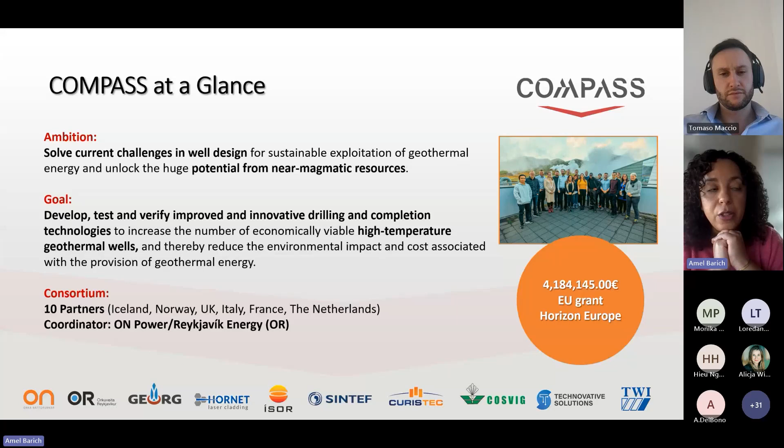and also supporting the environmental aspects around geothermal drilling in terms of reducing the footprint of wells and drilling, and the overall environmental and social impact of such developments. Compass is a consortium of 10 partners from Iceland as the coordinator, Norway, UK, Italy, France, and the Netherlands. The coordinator in Iceland is On Power, supported by Reykjavik Energy. The budget is a bit more than 4.1 million euros, and this is a grant from Horizon Europe.

So moving on to our speakers, we have 4 speakers from the Compass Consortium from 4 different partners. Our first speaker is Hieu Nguyen Hoang, a senior scientist at SINTEF in Norway, and an expert in geothermal energy and thermal energy storage. His expertise also includes geothermal well design, high temperature applications, and materials integrity, on which his talk will be today. And then Tomaso Maccio, who is a project engineer at TWI and a specialist in laser additive manufacturing. His expertise includes powder bed fusion, directed energy deposition, and extreme high-speed laser application, also known as EHLA technologies. And his talk will be focused on that.

Tom has been leading the first project in the UK developing such technologies, which led to the largest cell being developed in Yorkshire in the UK. And then we have Arna Paulsdottir, who is head of resource innovation at Reykjavik Energy. She has a strong background in chemical engineering, and her expertise includes valorization of geothermal waters, lithium extraction, and geothermal resource development. She's also involved in leading the latest IDDP, or Iceland Deep Drilling Project, the third one, which Reykjavik Energy is working on to make happen, hopefully in the coming years.

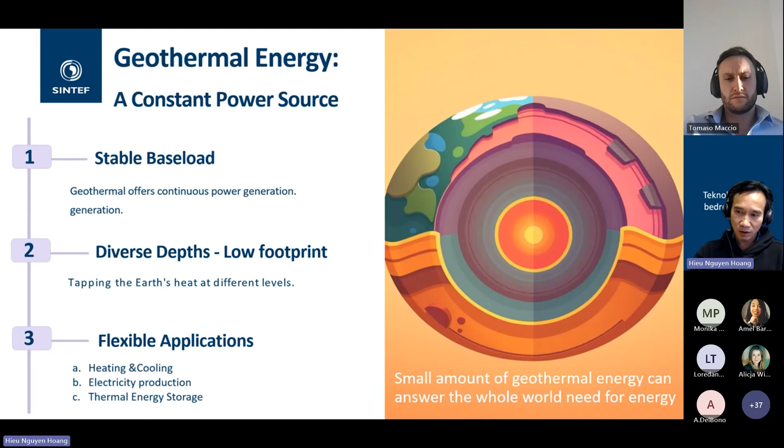As most of you may know, geothermal energy is a very reliable and sustainable power source that we can harness from inside the earth. It offers very continuous energy production, regardless of external factors like weather. The versatility of geothermal energy allows us to use it not only for heating and cooling, but also for electricity production and even for energy storage. What is interesting with this technology is that even a small amount of energy from the earth could meet the whole world's need for energy, and it makes that type of energy a very interesting and essential player in our future sustainable energy mix.

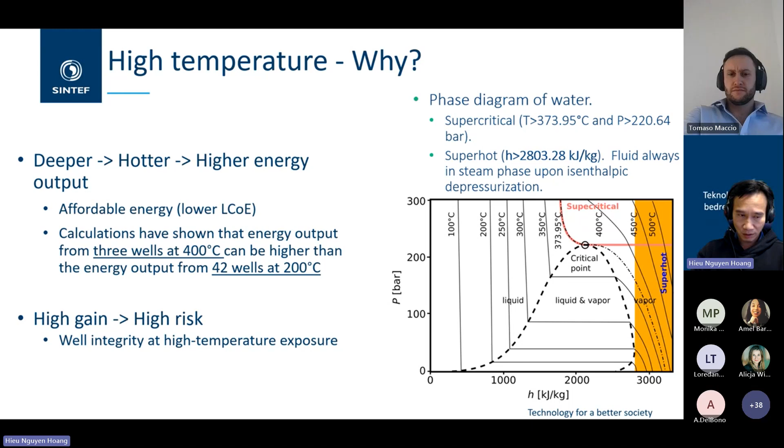Why are we focusing on high temperature applications in this project? Simply put, we know that the deeper we go, the hotter it gets, and the higher energy output we can have. Many studies have shown that just 3 wells at high temperature, like 400 Celsius, can produce more or less the same energy as 42 wells at 200 Celsius. It makes high temperature applications not only low footprint, but also economically attractive. But as you know, with high gains come high risks, as usual, right? Particularly for well integrity in this application, when the whole wells are exposed to high temperature.

Operating at high temperature conditions introduces a unique challenge for well integrity, because we have temperature cycling, high temperature introducing a lot of thermal expansion, leading to high thermal stress in the casing and cement. And we have nasty chemistry in the produced fluid, including hydrogen chloride, and this is very detrimental for casings, leading to serious problems related to corrosion and scaling that we have seen in many wells in the past.

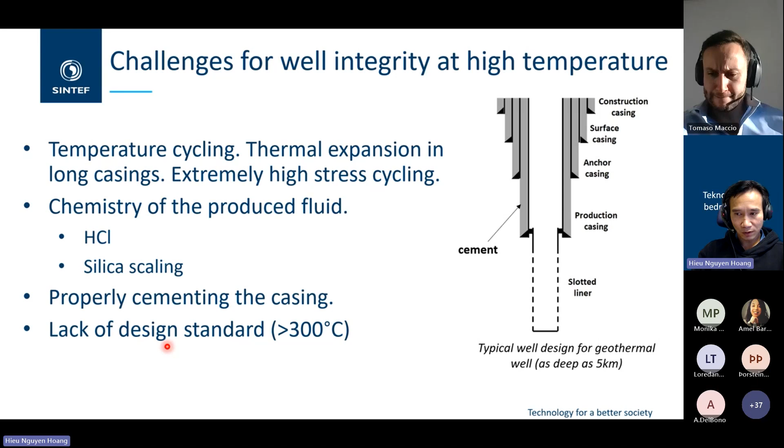In addition, we need to do a proper cementing job of the casing, especially when we need to cement from the casing shoe to the surface. It is extremely challenging because these wells are as deep as 5 kilometers, and cementing that long distance is not that easy. This is a one-time job. If we fail in the cementing job, we may fail the whole well construction and we lose the well. And the lack of design standards for operating beyond 300 Celsius adds complexity to the next level. So addressing all of these issues is crucial for developing reliable geothermal operation in the future.

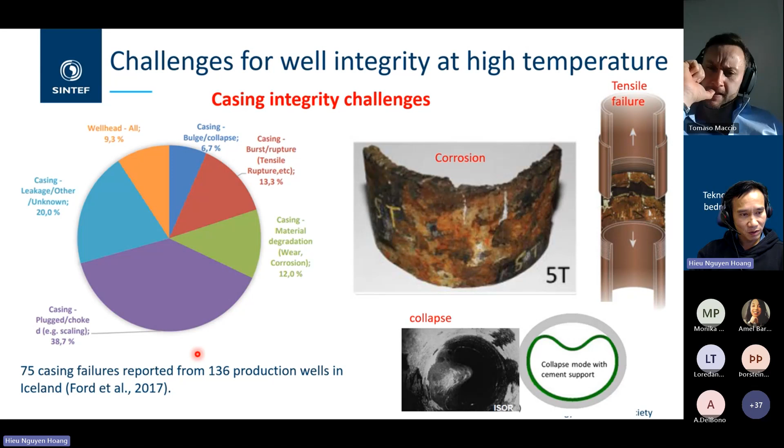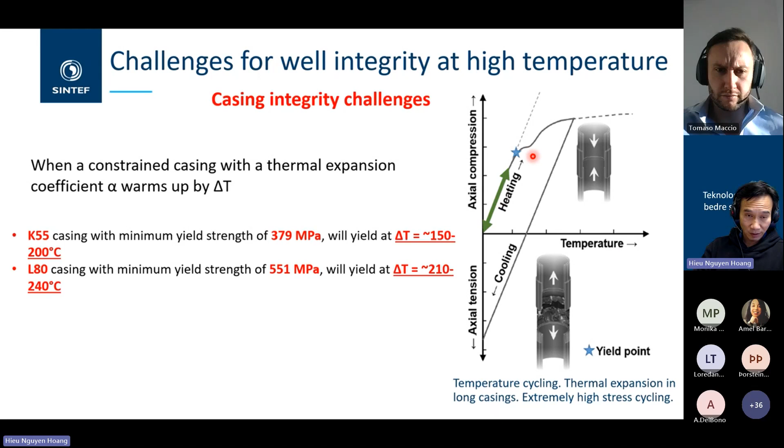Innovative solutions are needed to reduce thermal stress and bring the thermal stress in the casing system to an accepted level, like the elastic limit here, when we are operating at high temperature. The reduced stress will ensure long-term well integrity.

To address all of these challenges in an effective way, we need to have a deep understanding of downhole physics in this application. And at SINTEF, we develop advanced simulation tools for high temperature well analysis, which allow us to explore the use of different materials, like advanced materials for casing and cements, explore the use of advanced solutions like flexible couplings, and develop alternative well design constructions to enhance performance and reliability.

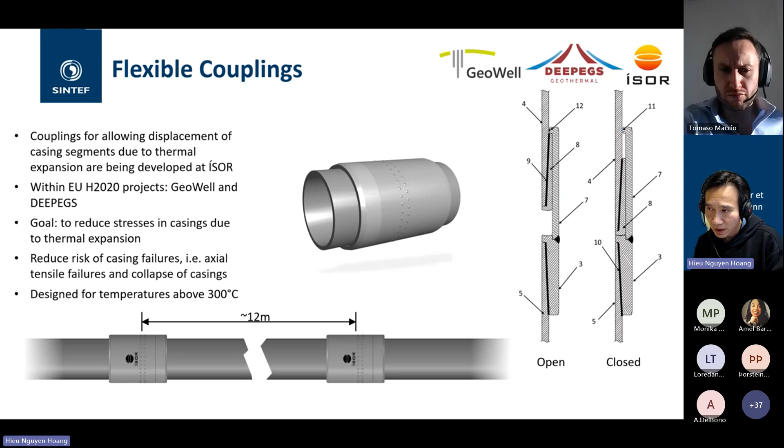It represents a breakthrough technology addressing the thermal expansions. It was developed mainly in this Horizon 2020 project, GeoWell, and these couplings allow the casing segment to move in axial directions in order to reduce thermal stress and minimize the risk for failure, like casing tension and collapse. And this coupling can be designed to operate at high temperature, above 300 Celsius or even higher. And we believe that this technology is a game changer for future geothermal well integrity as a whole.

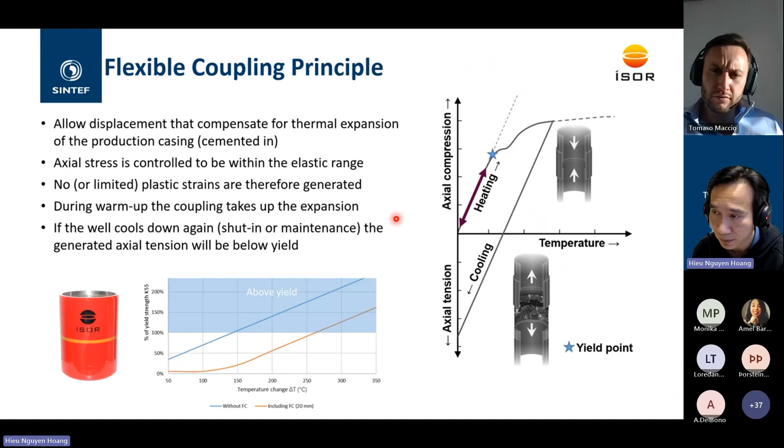And let's have a look at how this flexible coupling works. As you see here, when we are heating up the casing, the flexible coupling absorbs the thermal expansions, allows the casing to move in the axial direction, and absorbs the thermal expansion in these directions, meaning keeping the axial stress at an acceptable level, and prevents plastic deformation in the casing system as a whole. And this ensures the casing system remains intact during the temperature fluctuations, making it a very attractive solution for future application.

Okay, and move forward. Okay.

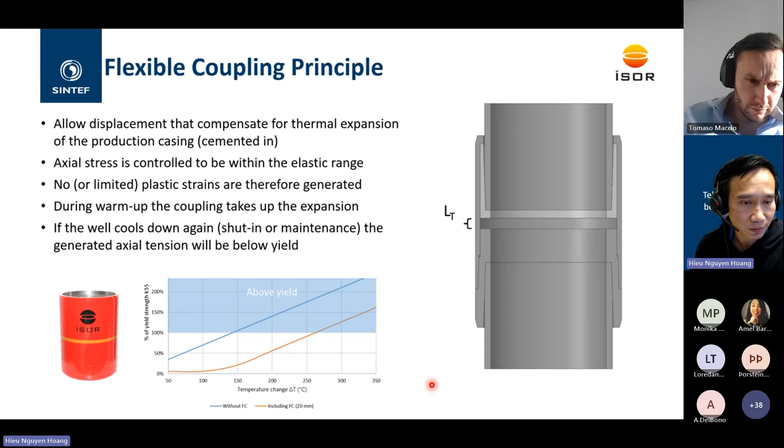And another key innovation that we're investigating in this project is a flexible foam cement. The core idea is that we would like to increase the flexibility of the casing system as a whole, not only in axial directions by flexible couplings, but also in radial directions. So the foam cement, as you notice, is more compressible, and we believe that it can work hand in hand with flexible couplings to enhance the flexibility of the casing system as a whole, and then we can reduce thermal stress. This is the principle behind this core concept.

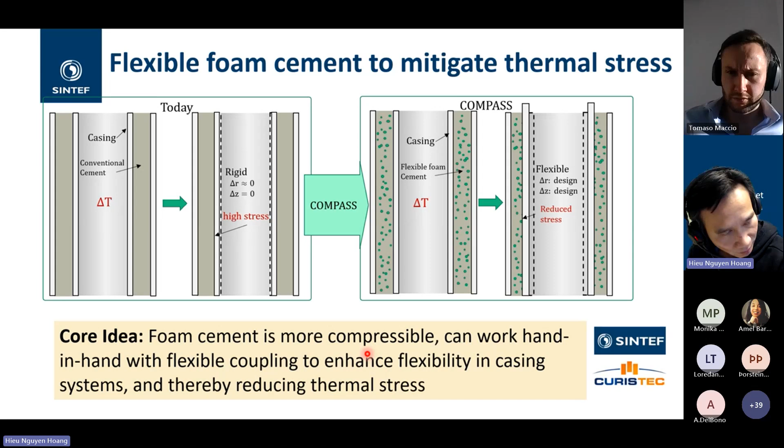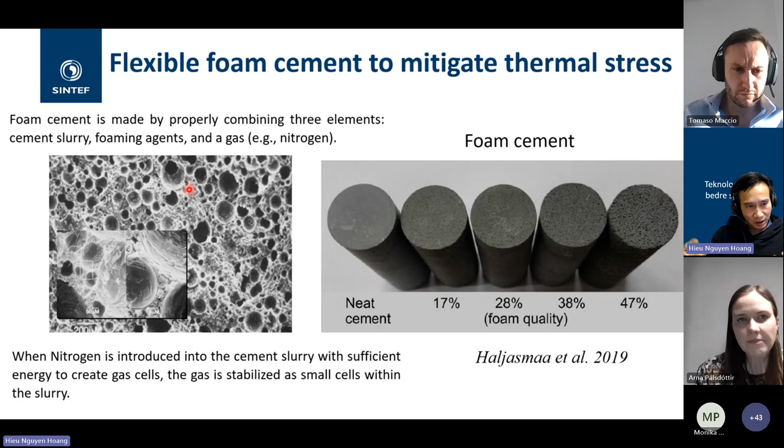And the foam cement, as you see, is made up by properly combining three elements: cement slurry, foaming agents, and gas such as nitrogen. When we inject the nitrogen gas into the cement slurry with sufficient energy, like inner pressure, we create gas cells, and the gas is stabilized in small cells within the slurry, creating a lot of bubbles and porosity, increasing the flexibility of the whole foam cement system.

In comparison to conventional cements, the foam cement offers low density. It means lightweight, minimizing the risk of loss of circulation. We have a low Young's modulus to increase the flexibility, but at the same time we have high ductility and high compressibility. It means that we have a lower risk of cement fracture and lower risk of microannulus creation. The only drawback is that this is quite a new solution, so the testing facilities are still not optimal yet. So we still do a lot of work to qualify and develop these solutions.

And here you see the proper design of foam quality is very crucial to ensure stability and optimal cement density, lightweight cement for a successful cement job, and also to ensure the mechanical properties of foam cement for sufficient load-bearing capacity when the cement is hardened and set.

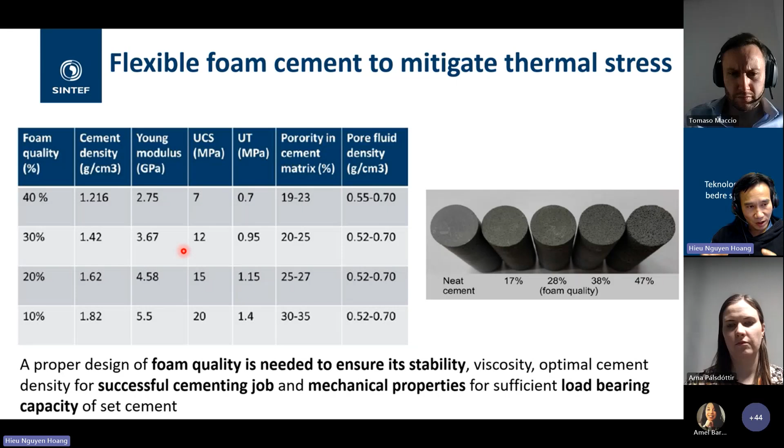In this table, you can see the influence of the different foam quality on the cement density, and also mechanical properties like Young's modulus, compressive strength and tensile strength of cement. As the foam quality increases, we reduce the density of cement, offering lightweight solutions, but at the same time we reduce the mechanical properties of the cements. So the choice of the foam quality needs to be compromised and optimized for different applications.

And in this figure, I would like to show the effect of foam quality on well integrity in terms of the thermal stress in the production casings. As you see here, the dotted line shows the thermal stress of the production casing when we are heating up to the temperature of 450 Celsius, in the configuration where we are using the foam cement to cement the production casing.

As you can see, when we increase the foam quality to increase the flexibility, we manage to reduce thermal stress in the production casing to within the acceptance limit defined by the API curve, minimizing the risk of plasticity. In some cases, we see there is still a risk for casing collapse defined by the API curve, the orange curve here. But still, this shows the potential and promising application of this solution to ensure the well integrity of the casings.

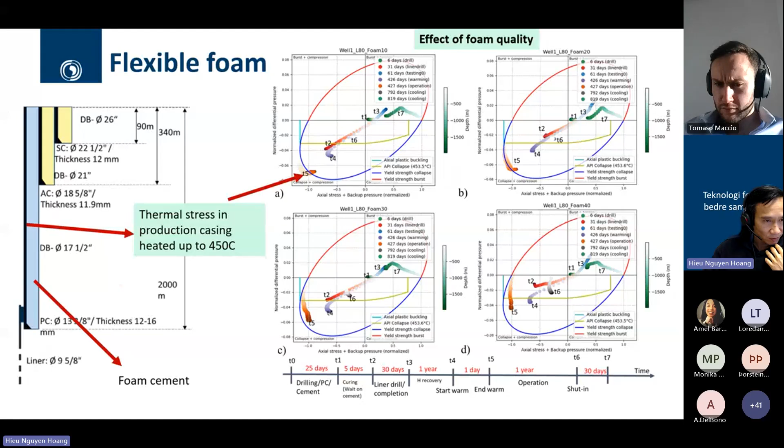We can also think of a situation to use foam cement in a different configuration, as we see here for a double production casing concept. When we use foam cement in combination with conventional cements, we manage to bring down the thermal stress in the casings to an acceptable level.

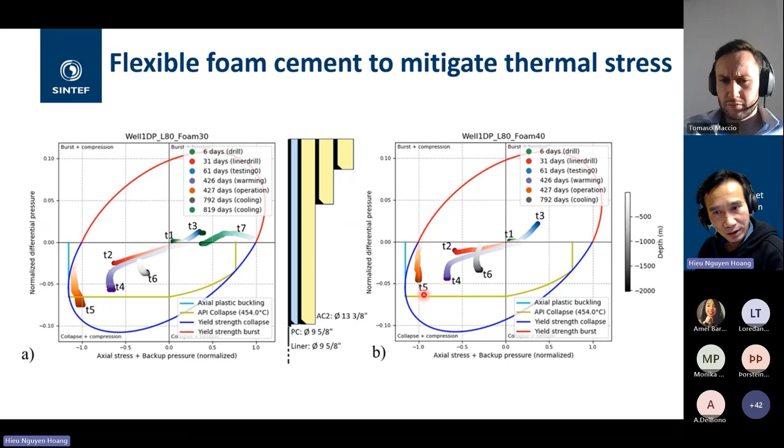This also ensures well integrity, not only regarding buckling plasticity but also at the collapse level. The main challenge here is the proper cement placement of this foam cement, which is very critical for well integrity.

Especially now, working with advanced materials like foam cement, we need to minimize lost circulation and ensure the chemicals stabilize in the cement slurry when combining the cement solution with retarder additives, surfactant additives, and gas to introduce the foam. We need a proper cementing job to minimize water pockets that can be created behind the casing system.

Optimizing the placement of cement solutions using advanced materials is very critical and requires innovative methods, such as reverse circulation, which we would like to investigate in this project for foam cement.

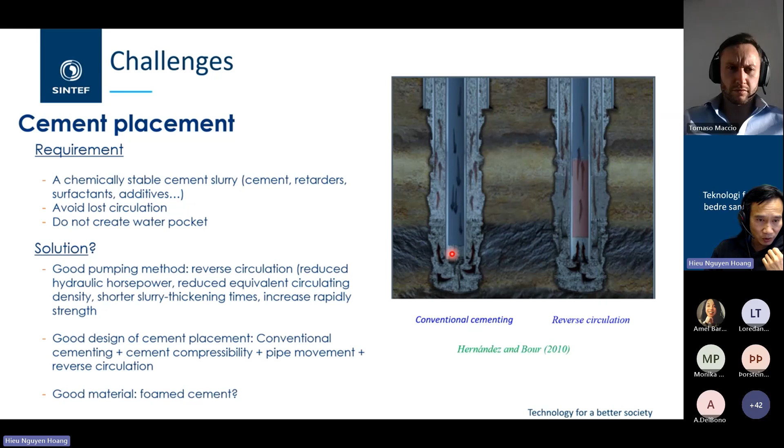This reverse circulation, as you see here, involves pumping the foam cement into the annulus instead of pumping the cement into the casing, and circulating the cement up to the surface through the annulus, as we have seen in conventional cementing.

Ensuring foam cement integrity requires extensive R&D activities at SINTEF and CURISTEC. Through this collaboration, we are developing advanced models like cement circulation software to optimize the cementing job and foam quality.

Here is an example of a cementing job simulation for conventional cement placement. We have also successfully applied this software to simulate reverse cementing placement, developed by our partners at CURISTEC. It's essential for optimizing foam quality and injection pressure during the cementing job.

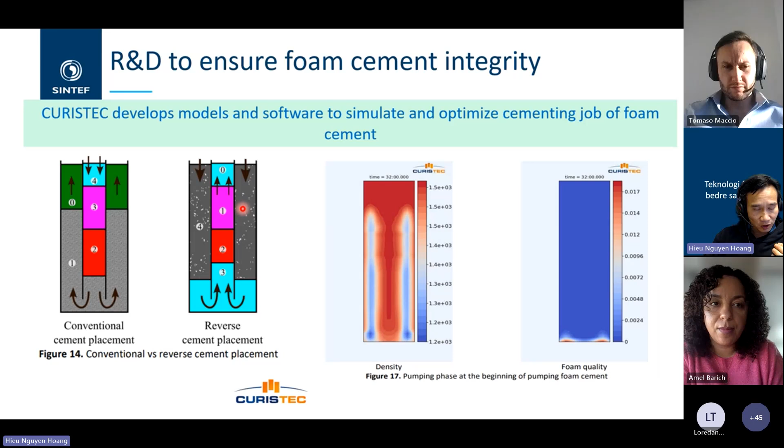CURISTEC has also developed a cement hydration model for foam cements to analyze the effect of cement hydration on mechanical strength after cement displacement and cement setting.

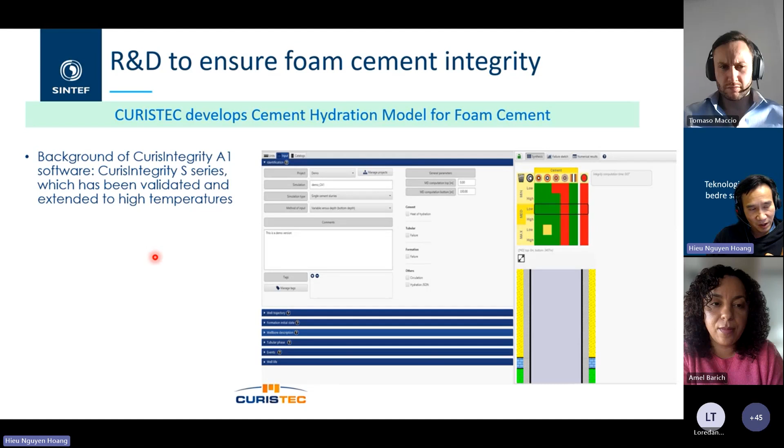At SINTEF, I'd like to show these figures again. We have been developing this simulation tool to analyze mechanical strength and well integrity of the system as a whole. We can analyze the effect of different cement solutions on well integrity, and how temperature and pressure changes affect well integrity, whether cement fractures or not, and how microannulus may be created between the casing and cement system.

Okay, sorry to interrupt you, you have one more minute to go. Okay, one and a half max, thank you, Amel. So I'll try to be quick here.

Last but not least, we need to ensure good thickening time for the cementing job. At SINTEF, we are aiming to develop a cement retarder solution that works at high temperature applications, giving us significant time to ensure a good cementing job.

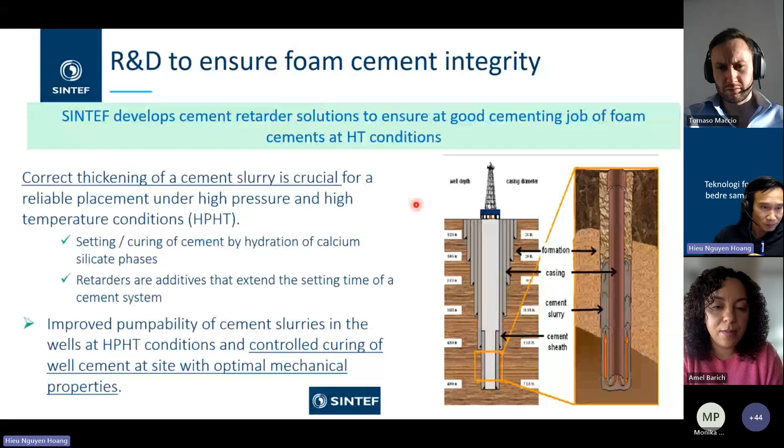Just a quick overview here, but I'll jump to mention that this testing is crucial for understanding how cement behaves under these extreme conditions.

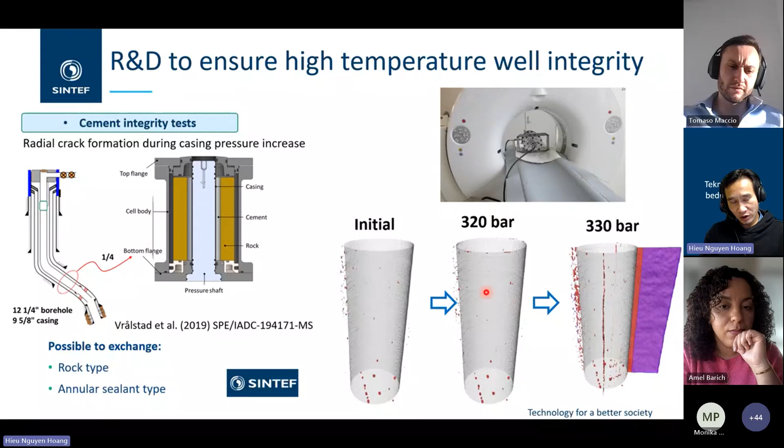Here is an example from cement integrity testing we've done at SINTEF. Experimental results show radial crack formations under pressure and temperature change, which is very important for us to optimize materials and close the knowledge gap in developing new material solutions.

To wrap up, high temperature geothermal wells offer immense potential, but there are significant challenges with respect to well integrity. Cement, as a primary barrier for the casing, has a critical role to ensure well integrity as a whole. We need to ensure a proper cementing design with high quality cementing job.

Foam cement in combination with flexible couplings are very promising solutions to mitigate thermal stress in the future. We still need continuous R&D activity and testing to bridge the knowledge gap and apply this innovation to other applications in the future.

Hi everyone, I hope you can hear me okay. It's a nice cloudy day today in Sheffield, Rotherham, so it's just nice. I'll be presenting on high-speed laser cladding, the benefits of that technology, going over a general overview of the technology and the achievements we've made so far within the Compass project.

The corrosion was so severe that it resulted in either a complete break or the complete corrosion of a large piece of metal. So TWI's role within the project was to use high corrosion resistant alloys, or CRAs, such as stainless steel and nickel superalloys, to create an effective corrosion resistant layer on top of the mild steel substrates that are used in the oil and gas industry and very widely used in geothermal environments.

Within this project, we're cladding stainless steel 316 and Inconel 625 onto a K55 or J55 substrate material. For this project, we've chosen to utilize extreme high-speed laser application, or EHLA. This is able to deposit thin, accurate layers with low dilution and at very high speeds compared to conventional laser cladding.

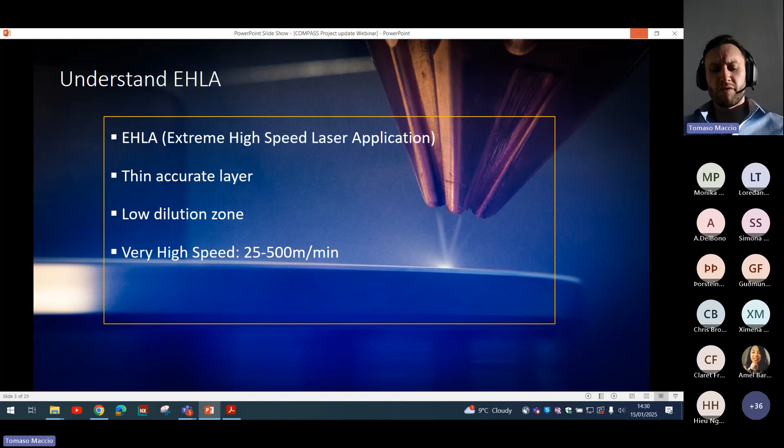One of the work packages within this project is to look at and do a study and report on the cost-saving mechanisms for extreme high-speed laser application as opposed to conventional laser application.

Whereas with EHLA, the melting is happening above the substrate. The molten powder is melted just above the substrate and then sprayed onto it, almost similar to thermal spray. So it's a buffer between thermal spray and laser cladding — it's got a metallurgical bond like laser cladding, but it's also kind of sprayed like thermal spray. So we end up with a much smaller heat affected zone and dilution layer.

With this, we can create high precision layers from anything from 20 micron up to even 300 to 500 micron layers. We get very low heat input as an advantage, low surface roughness, which is a benefit for crevice porosity and crevice corrosion, and a high deposition rate and high speed — we can go up to 500 meters a minute with the EHLA technology.

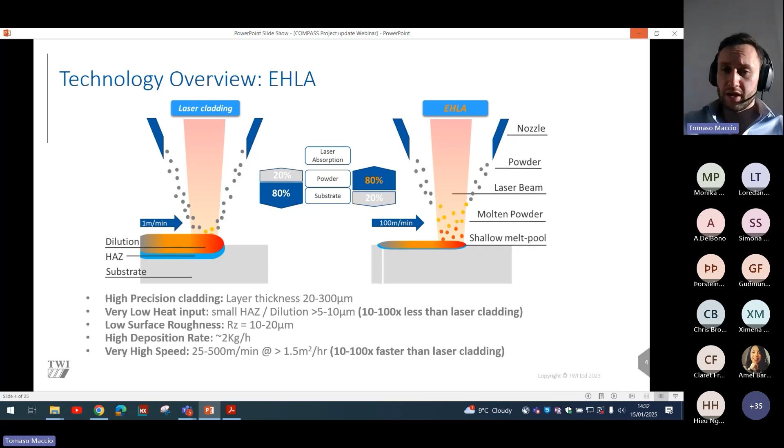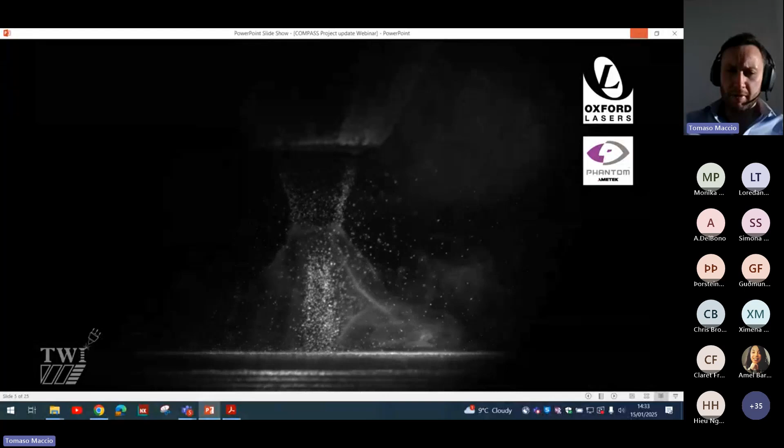This is another small video just to show and highlight the speed that we can process at with extreme high-speed laser application. The technology at the moment is used in several other industries, such as valves and seats, hydraulic cylinders, brake discs, and corrosion-resistant alloys. It's predominantly used as a thermal spray alternative, chromium plating replacement, and weld overlay replacement for corrosion-resistant applications.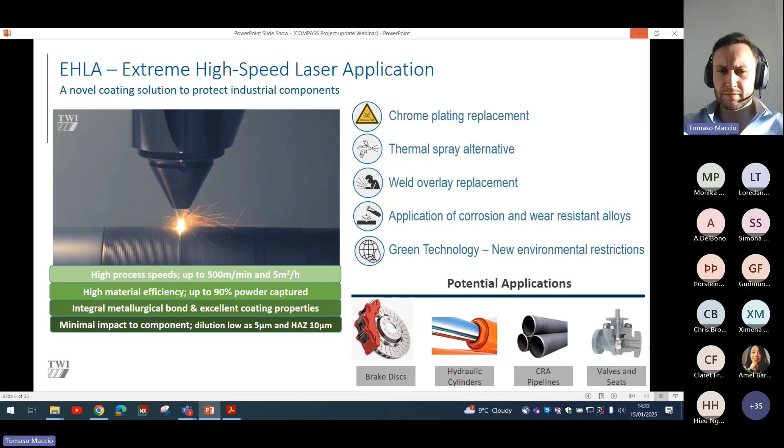So I'll be going into the work that we've done so far within the Compass project. We were able to purchase a large-scale machine, and I'll go onto that briefly. But before that, we did some small-scale trials on a machine that was currently within our workshop, so we set up

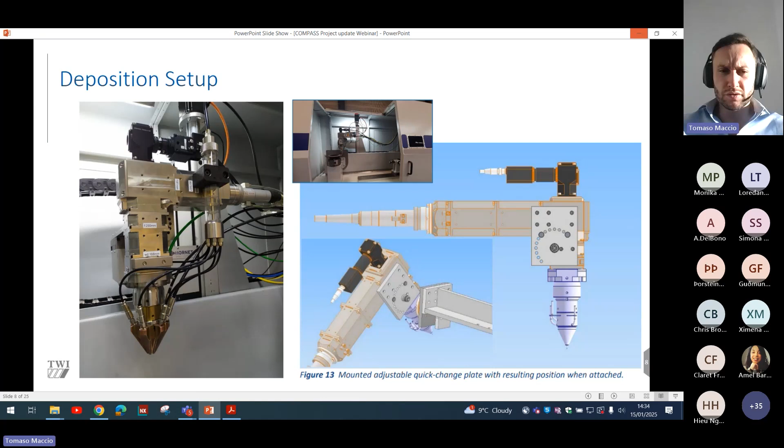a nozzle for doing the external deposition at first, to ensure we were able to deposit the material onto the substrate material without cracking or porosity. We wanted to do it in a step-by-step method to ensure we were getting the desired results. So the setup was complete here on the small scale machine.

Then we did first initial trials on internal bore cladding on the small machine. Got a small video here now. You can just see the edge of the processing happening here. So that was on the small scale machine, and this was done within the first year of the project, just to understand how feasible what we're trying to do is.

We had some issues with powder buildup as we were processing at fairly low speeds, because we only had a small machine and only a small amount of laser power.

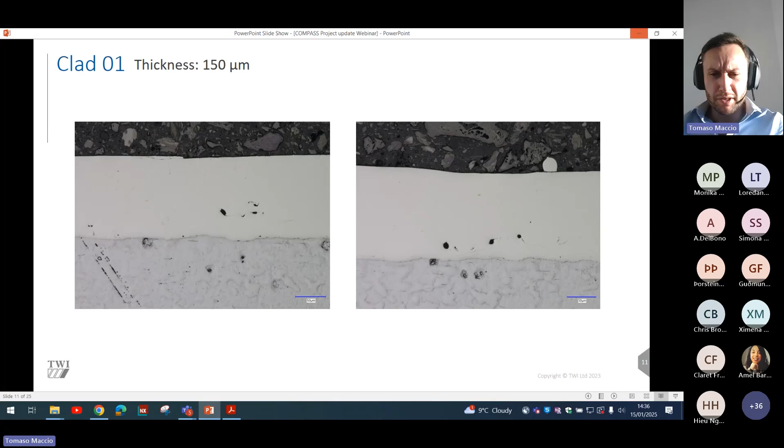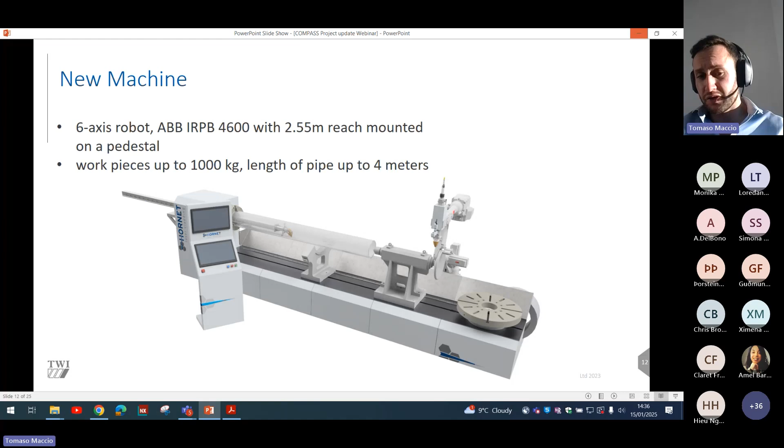We were able to do work pieces up to 1,000 kilograms and length of pipes up to 4 meters, with a 6-axis robot with a 2.55 meter reach and other axes as well. So it's a 6-axis robot plus a manipulator - 7, 8, 9 - so it's a 9-axis machine we're working on, and then a gantry rail at the back, making it a 10-axis system.

Within the project, we were able to go to the Netherlands - that's Hornet Laser Cladding, you can see their logo here. Hornet are part of the project as well, and we've worked really closely with them and had a great collaboration throughout the project.

We were able to complete the factory acceptance tests with them. You can see the cladding here - I'll just play this video briefly. So cladding is taking place here, this is just at slow speed, so conventional speeds.

And then we went on to trial high-speed laser cladding as well within this project.

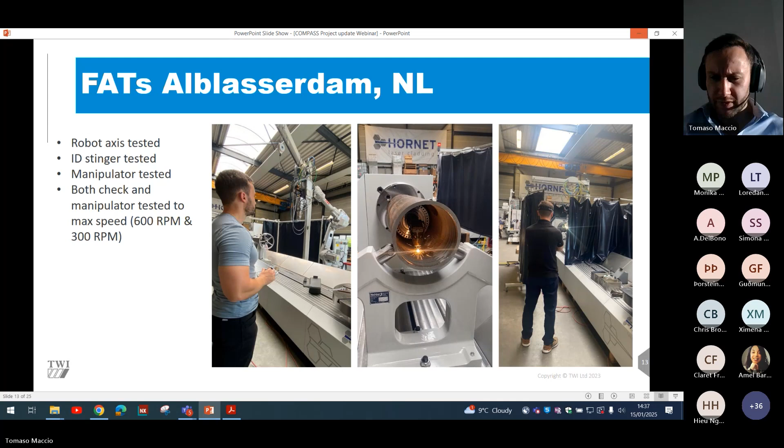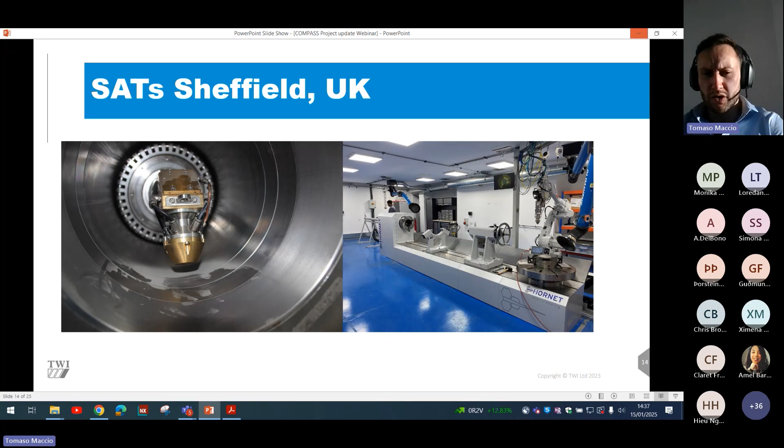The site acceptance tests were completed at TWI Sheffield last summer, in late summer. You can see up close the internal bore cladding head and the cell all set up. So we went from a CAD model, from the small scale machine CAD model, all the way to delivery of the new cell - all done under the Compass project, and a real great achievement for the project.

Following that, we had a methodology for what we wanted to do for the trials. We wanted a fixed spot size of 3 millimeters, as this is predetermined by the internal bore. Clad speed we wanted to keep at around 10 meters per minute for the samples being tested, because these samples are not on a shaft, they're on either a plate or discs, so this needs to be done on the robotic arm. The robotic arm can't move at much greater speed than 10 meters a minute with extreme accuracy, so we had to use a fixed speed of around 10 meters a minute.

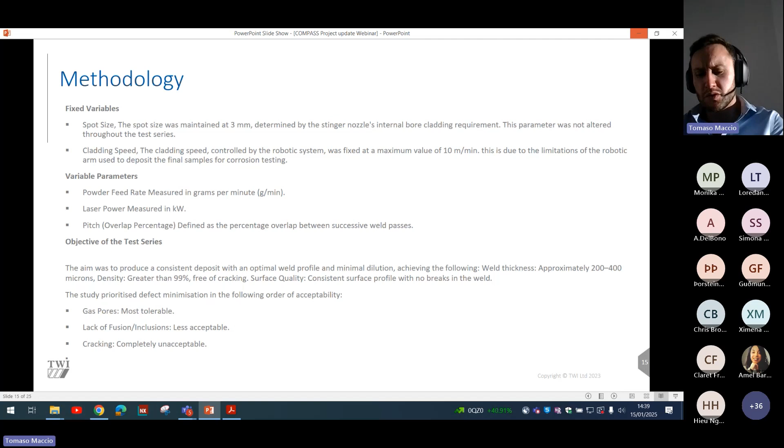What we did look at though, to be similar to the shafts, is varying powder feed rate, laser power measured in kilowatts, and pitch in overlap percentage. We wanted to try and deposit as fast as possible, working towards the end deliverable of understanding the economical benefits of utilizing extreme high-speed laser application.

For this, we completed a large full factorial parameter test series - 28 samples for the first material, which was Inconel 625, and we're currently underway with the second material, stainless steel 316L.

Some of the initial trials that we completed - you can see the surface roughness here. This is samples 1 to 9 of the 28 that we completed. You can see there's a good level of surface finish for the Inconel 625 samples that were printed here.

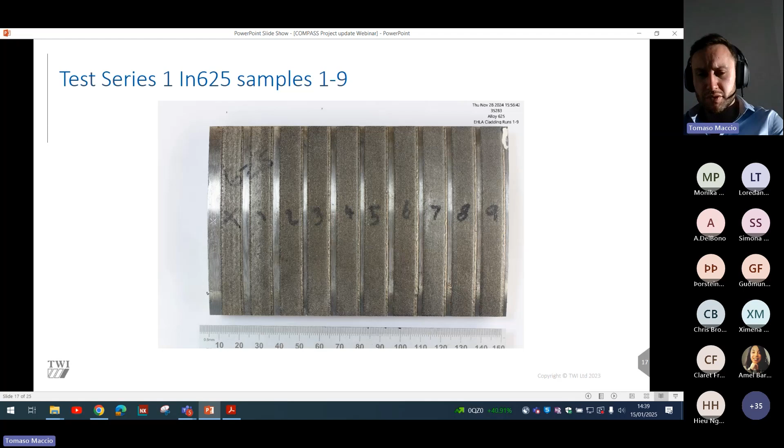This is just a small selection, a look at some of the results that we got from this test series. We did a full analysis of all of the samples, and SEM analysis for a selected few samples.

So again, some small defects on these, and the thickness is not as expected on these, but this is more where we were looking at. The defects are very, very minimal. We're getting around 10 micron defects on these samples, and the thickness is quite desirable. We're getting a 250 micron layer thickness, which is really what we're trying to achieve.

As I stated before, one of the main benefits of EHLA is the heat affected zone and the dilution of the weld. If this was a traditional laser cladding deposit, we'd have quite a mixing of the melt pool, so we'd have a lot of the substrate dragging through into the deposit. That's dragging the iron that's in the substrate, which is obviously susceptible to corrosion, through the deposit, making it less...

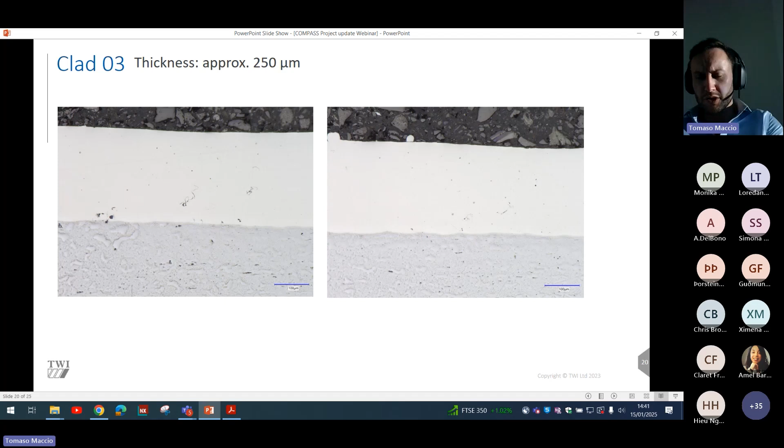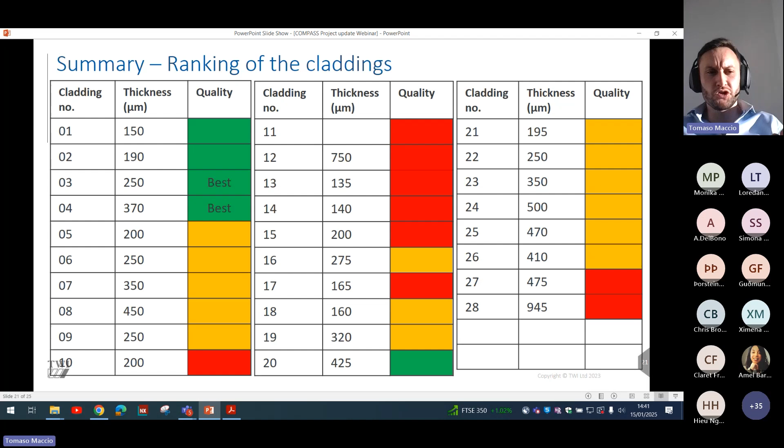...less corrosion resistant. Apologies. So from the samples, we've ranked all of those based on layer thickness and also a score on porosity. The porosity measurements aren't in this slide deck, but we've done a porosity measurement as well, and we've thresholded and mapped that out to choose the best parameter set that we'll go forward with for testing.

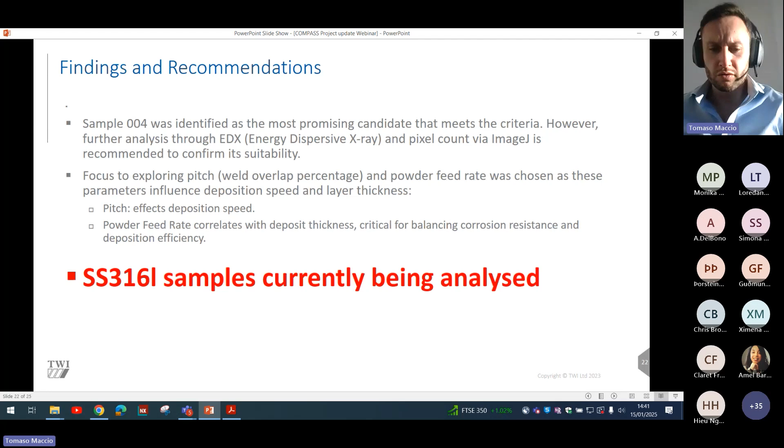So the findings were we've chosen our best sample based on our parameters, and now stainless steel 316L samples are currently being analysed. We've done a deposit and a test series again on the 316 samples, and they're currently being analysed as well.

Following this is not my forte. I'm a deposition engineer, and one of my colleagues, Irfan, who's working on the project, is in charge of running the testing. So this is a schematic of the autoclave that we'll be testing the samples in.

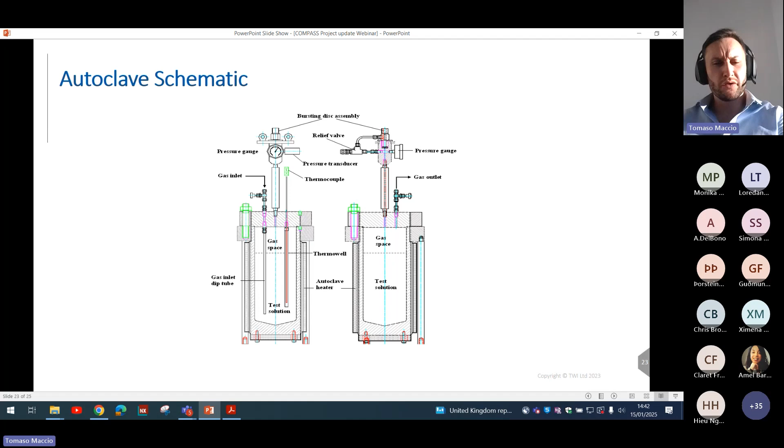From my understanding, I believe it's a 30-day autoclave test that we're going for, under conditions that have been specified by the University of Iceland and On Power. They'll also be subjecting the samples to a 4-point bend test to universal standards and UK standards.

It's been quite tricky sometimes getting the correct samples for the bend tests, considering the distortion and the standards. Considering the standards, samples have to be of a certain size and not on a shaft. So it's been quite difficult and challenging, and it's been really good to find out from this project how we need to design samples to then be tested. It's been a really interesting project to work on.

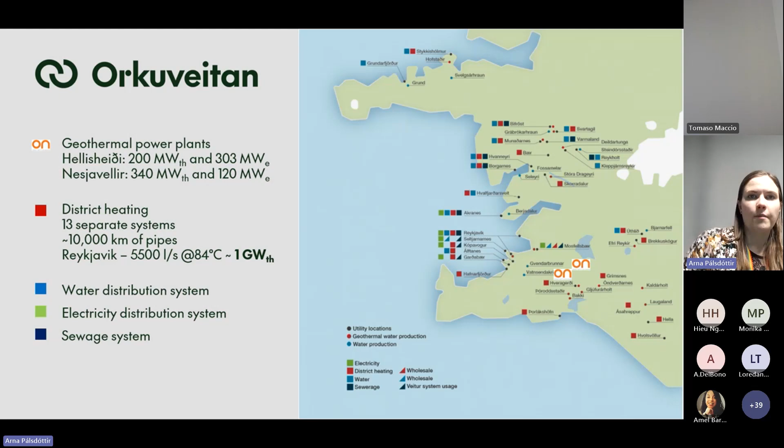But now, moving on to Superhot Geothermal. Why are we looking at Superhot Geothermal?

Superhot Geothermal has been defined in a number of different ways. The original goal of the IDDP, or Iceland Deep Drilling Project, which sparked a lot of the Superhot efforts in Iceland, was to reach supercritical conditions in the deep well that was to be drilled. That means going beyond the critical point of water, so above 374 degrees C and 220 bar.

We have also, at least internally, been thinking about Superhot as temperatures above 400 degrees C at depths of 2 to 5 kilometers. But really, if we boil it down to what we're actually looking for, it's high enthalpy in the wells, above 2,800 kilojoules per kilogram at a depth of 2 to 5 kilometers.

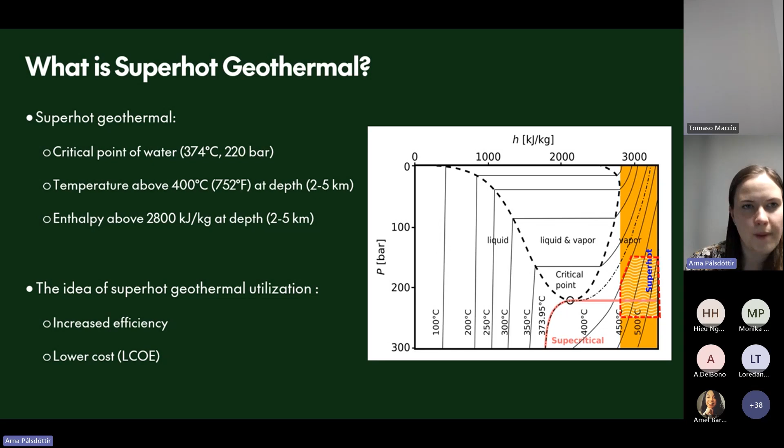The idea is higher enthalpy wells give us increased efficiency in our energy generation, but also more megawatts per well. That leads, hopefully, to lower costs per megawatt hour, so a lowering of the LCOE. Fewer wells and more power is really what we're looking for, and to do that, we need this high enthalpy.

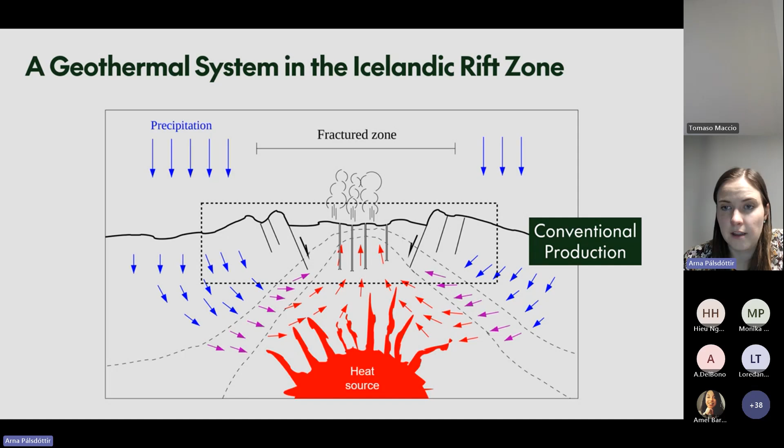But what we know is that below our systems we have a whole lot of hot rock, a huge volume of rock that we're not using. So the purpose of this Superhot utilization is twofold: it's the increased or lowered cost of energy production and the increased power production from each well, but it's also unlocking the rock below our conventional production zone to unlock more resources.

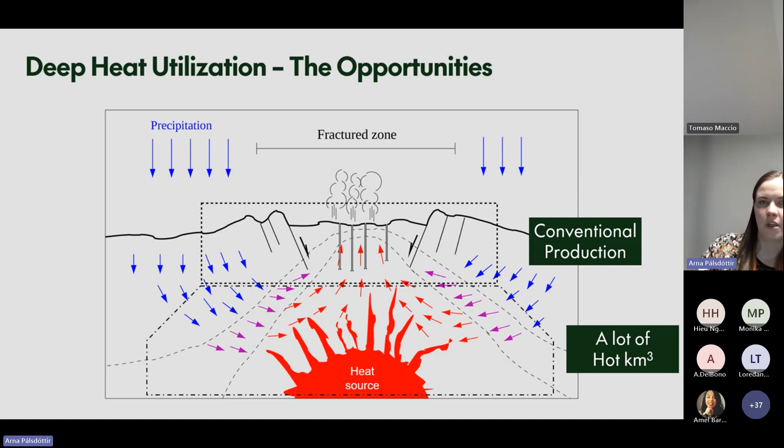But there's a lot of challenges when we look at Superhot geothermal. Firstly, the challenge is locating the heat source. Fortunately, that's something we've worked on through the years, and we have a lot of experience in the areas we operate in. We believe we have a pretty good idea of a number of locations where we can locate these Superhot geothermal resources.

Once we have drilled and found that resource, there are reservoir characteristics that are a challenge. What's the volume of the resource that we actually reach with the wells we drill? And what's the permeability? Are we actually going to produce fluids from this?

Another challenge is the fluid characteristics. This is something we know from IDDP-1, where there was flow from that well, but the flow was of highly corrosive fluids. So HCl is a challenge that comes with these Superhot fluids. We've gone through extensive geochemistry analysis to show that this is going to be a problem - that we're always going to encounter HCl there. That's just the geochemistry of the interaction of the fluids and rocks at these temperatures we're aiming for.

Scaling is also an issue, but that's highly pressure dependent. And then another challenge is drilling deeper into hotter formations - how are we going to do that?

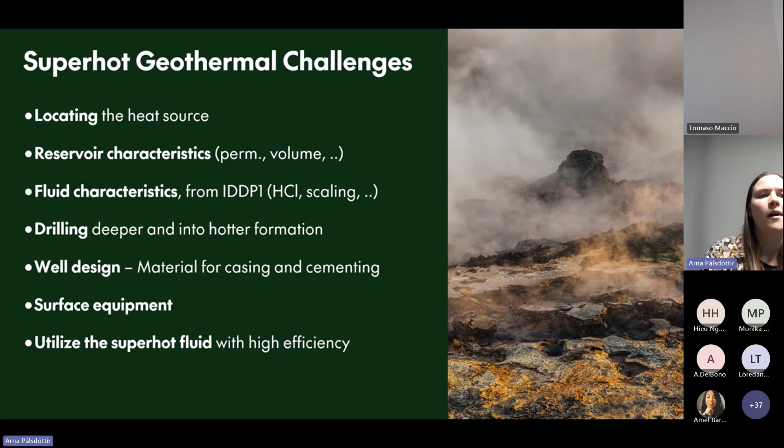And lastly, before I move into the circularity, this is sort of the roadmap that we have for the deep geothermal utilization at Reykjavik Energy. So we're taking a stepwise approach in this. The first project that we're going to do, and one of the reasons that we're doing that first is also to wait for the results from the Compass project and be able to implement those in traditional wells before we move on to deeper wells.

But the first project, which is on our plans in 2026, is deep injection. So drilling an injection well that's cased and goes below our traditional production zone and into super hot formations there, and using that to support our current production. So that's 2026 in our current plans at least. And then we have the deep producer, IDDP3. That's in our plans in around 2028.

And that's this traditional concept of just drilling a deep well, casing off the conventional production zone, and producing from that well. And that's where we need all of that technology that we're developing here in the Compass project. And then if we look a little bit further into the future, we are also looking at deep EGS, or what's also these days being called Superhot Dry Rock, or SHR. And that's kind of combining the deep injection and the deep production, but allowing us to move into areas where we might not have the permeability and the availability of fluid that we have in our current areas.

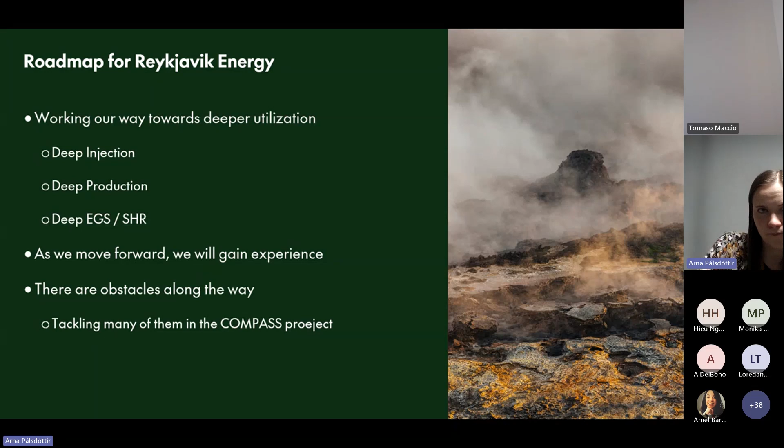Now, moving on to circularity and circular by design. So one of the scopes for circular by design is to reuse, minimize waste, recycle, and be sustainable in operations. Now, in geothermal and the way we've been talking about this within the Compass project so far, but of course our work on this is not done, as we've not turned in a report on this, is that we have two main ways to look at circular by design in geothermal. There's the circularity of the equipment that we use, but then there's also the circularity of the resource.

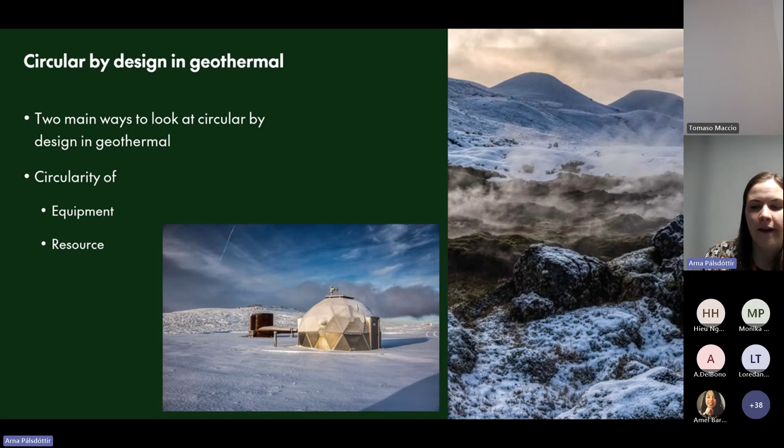And if we look at the equipment, a way to be circular in equipment is to have modular surface equipment. So for example, reusing silencers, reusing well houses, reusing pipes, anything that you can reuse, reuse that. So that's sort of this reuse part. Then having any equipment be made of recyclable materials. That's quite an easy thing to do in general. In geothermal, we're mostly working with metals and cements, so recyclable materials. This is on the surface.

It is really hard to enforce circularity for subsurface equipment, as firstly, we have a really long lifetime of the wells, and secondly, it is quite a challenge to retrieve the subsurface equipment after the lifetime of the well is done. But what we can do there is, again, use recyclable materials, and there's not really anything that we have to change in our operations for that.

But when we think about super hot utilization, that definitely comes with challenges to think about circularity, because up until now, at least, these super hot wells have been one of a kind. So the equipment is kind of being designed on the go and very bespoke for these wells. But it's definitely something that we need to think about as we want to move towards drilling more and more super hot wells to try to maintain this idea of circularity in the reuse of surface equipment.

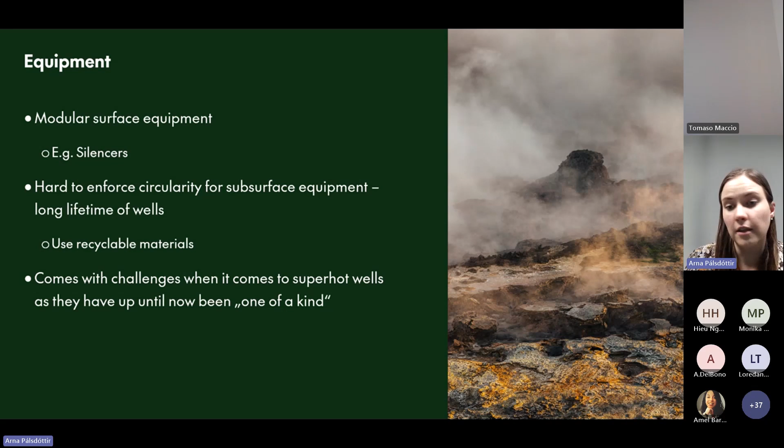Now moving on to the resource, a way to be circular in the use of the resource, or my favorite way to think about this at least, is to have multiple uses of a well through its lifetime. And I'd say that's the key aspect in circular by design in geothermal, because we're not working with consumables that can be reused or recycled at the end of lifetime. We are rather thinking about the circularity in the use of the resource.

And when we look at super hot wells, and any geothermal well or any high temperature geothermal well, what we know is that as we start to use the resource, as we drill into this overpressurized geothermal field that we're working in, the pressure will start to drop. And we can do all sorts of injection and many things to make sure that the power production from those wells lasts for as long as possible, but eventually the pressure will start to drop.

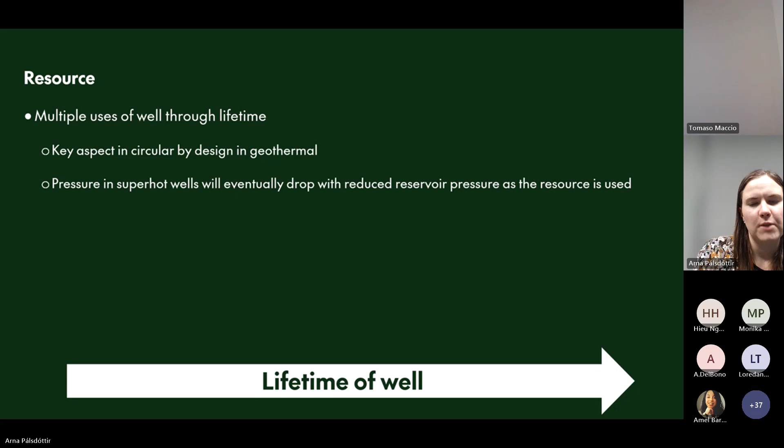So at the start of the lifetime of a super hot geothermal well, we can produce power from it, of course, and that's maybe the main goal when we're looking at super hot wells. We can take the fluid that has been used for power production and produce heat from it, thermal energy for district heating or industry. And then we can take the fluid that comes from the heat production and use that for fish farming, for drying, for bathing, algae growing.

There's lots of different options, carbon capture, like we do at our power plants. So there's lots of different options for the cascaded use of the resources, and this really hits on the sustainability part of circularity by design. So this is sort of the start of the lifetime of the well.

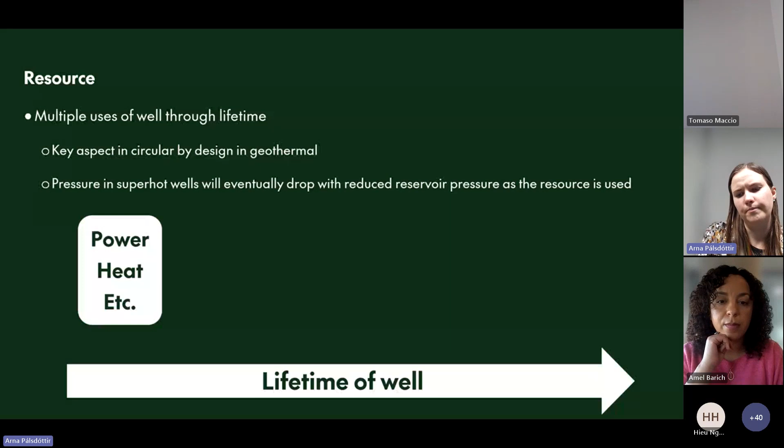Then as the pressure in the well drops, it can eventually drop so low that we're not getting a free flow of fluid from the well anymore. What we can do then is put pumps into the wells and still produce power, heat, and all that cascaded potential in farming and bathing. But eventually we know that the pressure and the temperature and the resource will drop far enough down that we will no longer be producing power from that well. So it'll be heat and other products.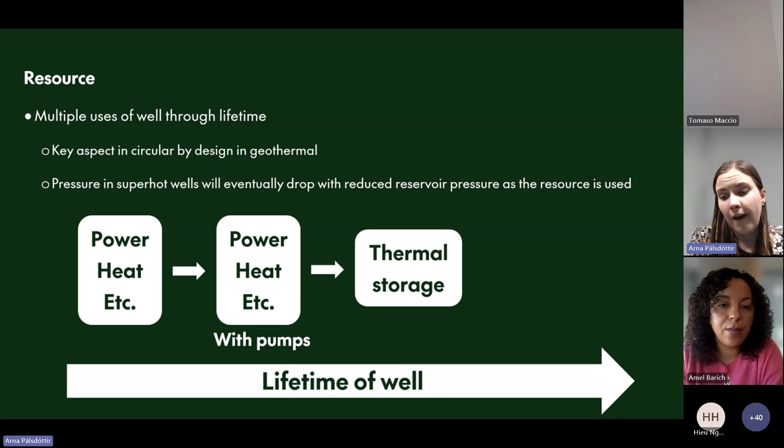And then once we have exhausted the use of that well for energy production, we could use that well for thermal storage. And once we've done thermal storage, we can use that well for injection. So this is really the frame of circularity in the geothermal industry, using the infrastructure, the wells that we put so much energy and money into locating and drilling, as long as possible. And at the start, when we're drilling the well, we need to make sure that we're putting sustainable materials into its construction, and that it is constructed well enough to last a really long time and support all these different uses of the geothermal resource.

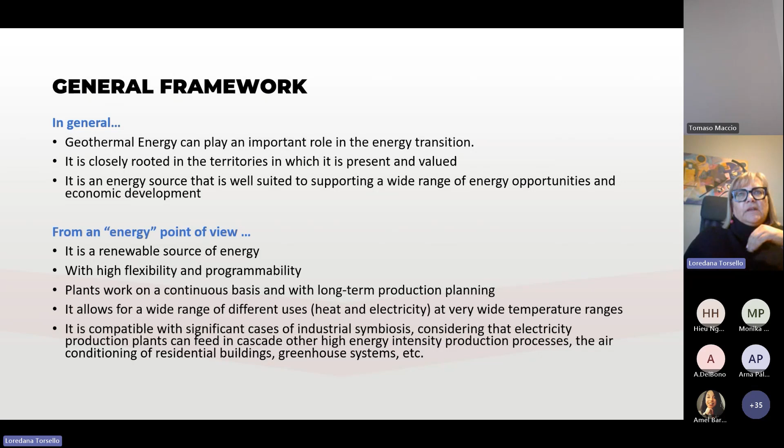So it's important that the characteristics are well known. We should increase the awareness about the capacity and the potential of geothermal energy, even in a cascade approach, because the industrial symbiosis that geothermal energy can support can be the key to include the geothermal exploitation in any link of the value chain and in the life of people living near the plants.

Which are the challenges? From our point of view, we know that there are some misperceptions of the opportunities and capacities and the advantages of using geothermal energy for electricity or for thermal uses, and many of these bad perceptions are due to the fact that people don't really know much about these opportunities.

So in our role, we are in charge to disseminate information, support training and capacity building, and to explain and disseminate all the outputs coming from the projects or from the research activities or the tests and experimentation that we can support in order to improve the capacity of using geothermal energy, and even the sustainability that is embodied in the approaches that we can support from the energetic and environmental point of view, because this is one of the main issues that we have to face in order to convince people about the capacity and the potential of geothermal energy.

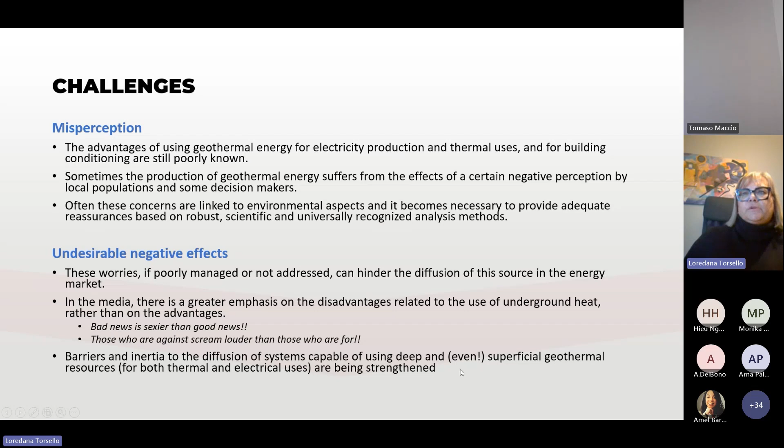Maybe because of the environmental aspects and worries, most people are skeptical about supporting new projects and the diffusion of this kind of energy source in the market. We know that sometimes the media are not good allies for us, because they prefer, generally speaking, to emphasize the disadvantages instead of the good and new opportunities coming from this kind of projects or solutions. And we know that we have to move to new approaches, trying to reduce the barriers and the inertia coming from the low and poor awareness about the opportunities coming from our proposal.

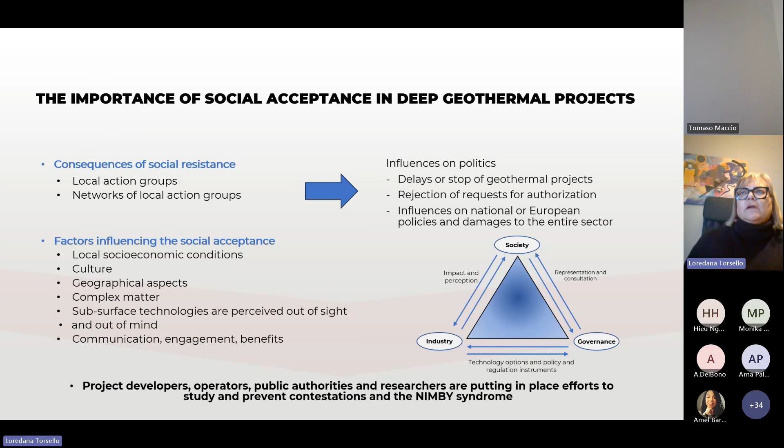Social acceptance is really important, because sometimes even good projects for producing geothermal electricity or heat can be stopped because the acceptance is too poor. So we can face some social resistance starting from the local action groups, and the local action groups are usually able to influence politics and decision making. Most of the projects can be rejected, even if the results and the benefits that we can obtain can be interesting for all the different kinds of stakeholders. We know that we have to take into account all the factors influencing social acceptance from all the parties involved.

So this means that if we have a bad perception of the impacts by society, we know that governance can be affected by the mood and the feeling that the communities express, and maybe can be much more skeptical about supporting the projects proposed by the industry. So for this reason, we have to take into account all the factors influencing social acceptance, from the socioeconomic conditions, the cultural approach, the geographical aspects where the projects should be located, and the characteristics of the subsurface and the technologies that we are going to propose.

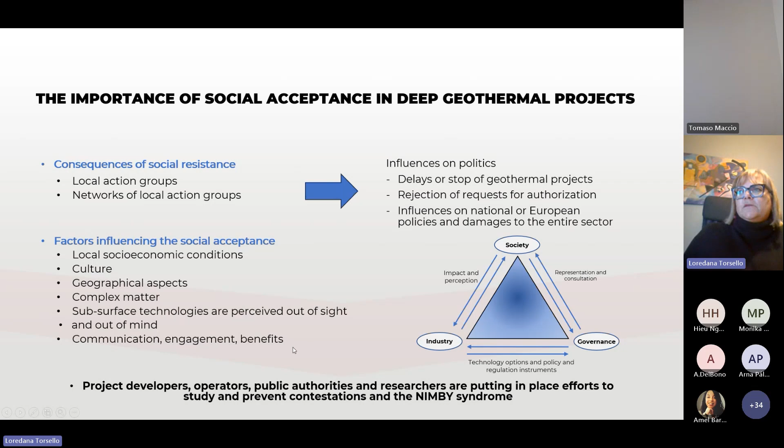And we have to face the communication, the engagement, and the benefits in order to explain very well the implications of the projects and the way in which the stakeholders can be affected by the project itself, trying to reduce the NIMBY syndrome that most of the time is one of the main issues that we have to face.

So in the Compass, we try to propose a working method, a methodology that is aimed to look at the previous experiences, try to understand which are the lessons to learn, and to propose a new approach or a clear approach for which the companies and the developers of geothermal projects should take into account. From this point of view, the methodology is based on 3 different pillars.

The first one is about the 5 W's. This means that we have to understand very well what, when, who, where, why a project has been proposed. What, because we should be able to explain what we are proposing, which kind of project, and the characteristics.

From the design, the engineering, the technologies that we are using, when the project will be realized in the plan, who are the stakeholders from the proponents, and even from the other stakeholders that can be affected by the project themselves.

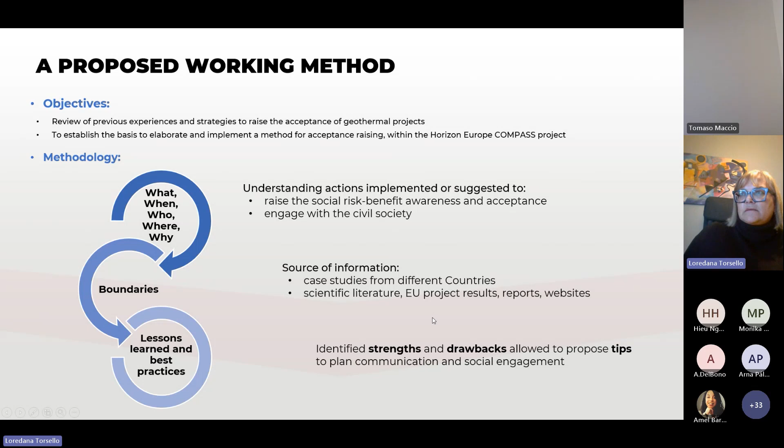And obtaining then the lessons learned and the best practice to propose as different experiences. So we have to consider 2 points of view.

In the communication and engaging with local communities, we collected some cases. I reported in this presentation just a few of them. Those are the projects that can be considered successful.

Successful projects from the acceptance point of view, and for the capacity of the proponents to involve, explain, and convince the communities that the project is a good thing for them in principle.

In the case of St. Gallen, the problem was the water availability and not the communities being against the project itself.

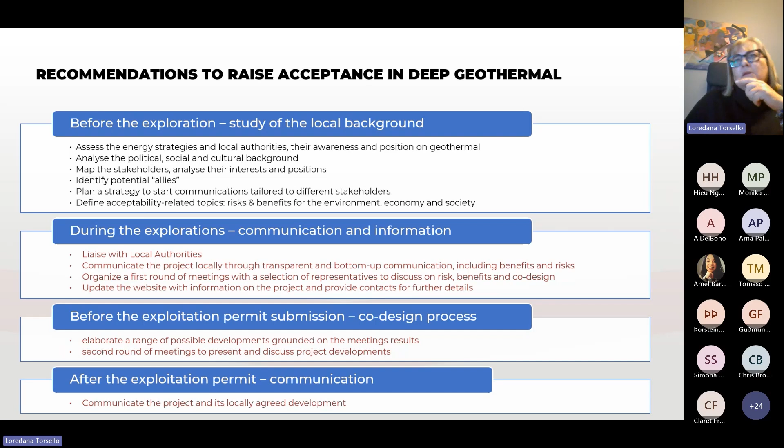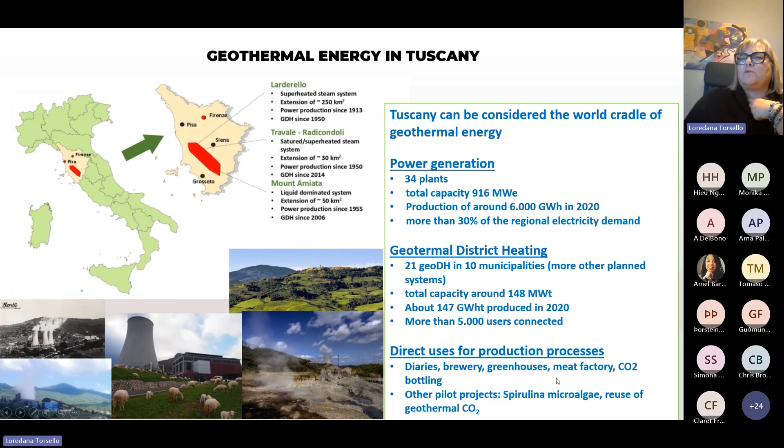We have 21 geothermal district heating systems in municipalities and some good opportunities for direct uses and cascade use of it from the power plants for dairies, breweries, greenhouses, and so on and so forth.

And this is important because in this way we try to emphasize the kind of benefits that can involve all the stakeholders, apart from the companies, the operators of geothermal plants, because this is one of the ways in which we can involve and convince people about the goodness of new geothermal projects.

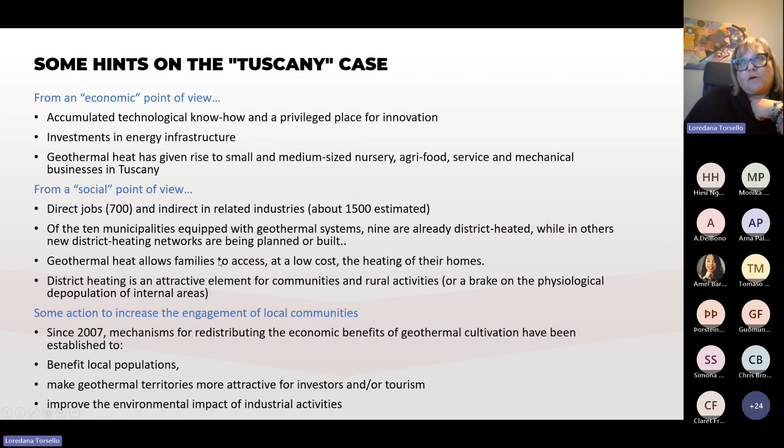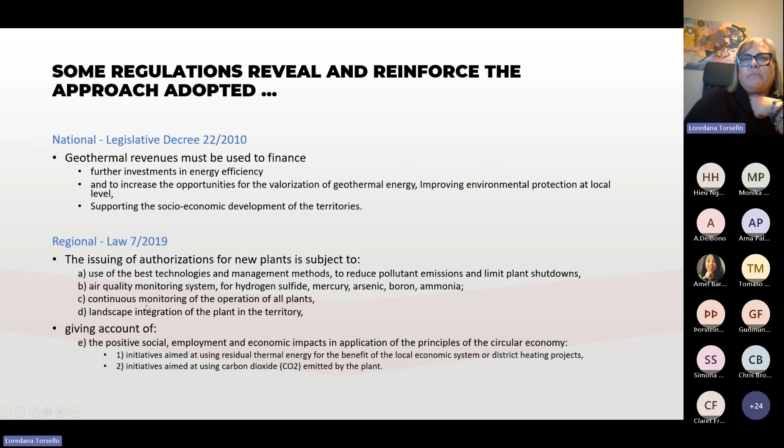Even from the regulatory approach at the national level and at the regional level, different laws support the importance of distribution of geothermal revenues for all the communities, and taking care about the environmental issues that can be considered under control by the population. So to wrap up, the perception of the geothermal project is really important, and proper and transparent communication is key. Projects integrated in the territories and sharing benefits with the population can be really important to create the conditions for which new projects and plans can be realized in the near future.

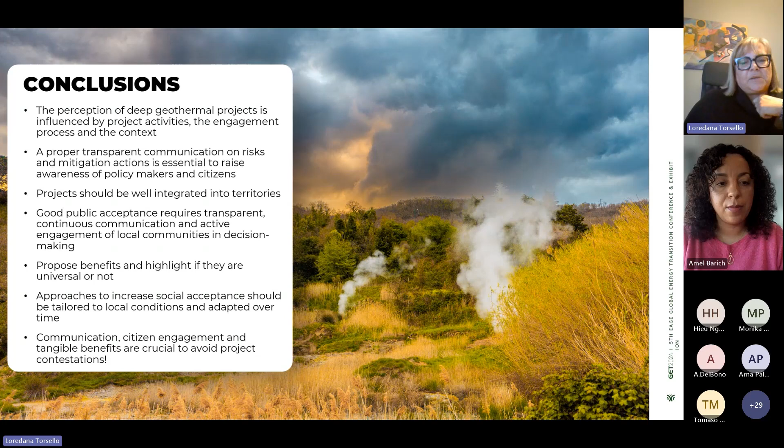Thank you very much, Loredana. This was a great way to end this first webinar, talking about the non-technical aspects as well, which matter in such complex and highly risky projects. And the case of Italy is definitely one that is worth addressing, given its long history with geothermal.

We have very short time left to accept questions, but we can take 2 or 3. There's one in the chat, and I'll ask our speakers to come forward with me. We have a question from Jeffrey Garrison about laser cladding, addressed to Tom. I see like 4 questions, so I'll take the first one. Jeffrey asks: how does the cost of laser cladded well casing, if using LAT for example, compare to the cost of just using higher grade casing?

Hi guys, I'll come in and go over them. So, how does the cost of laser cladding compare to just using higher grades, like a P110? I'm not sure, but for using a fully corrosion resistant alloy, say Inconel 625 casing, it was something like a 95 to 97% saving. For a P110, I still believe it'd be a substantial saving. I don't have the exact figures with me, but I could do some quick calculations. You could also consider the bulk or raw cost of a P110, and then the cost of an Inconel 625 or stainless steel 316, plus the amount of material that'll be cladded on. Think about it, we're trying to use a 400 micron layer - it's a super small amount of material that's being utilized in the end.